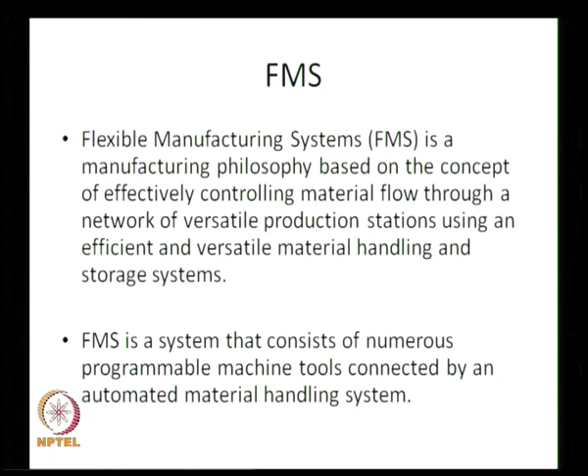Initial cost is very high largely because of the components of the FMS. A network of machines, a large set of programmable machine tools, each of them is extremely costly. Automated material handling and retrieval systems are costly. They can be rail guided or AGV, automated guided vehicles. Computerized control systems are costly to develop and implement, and therefore FMS is a costly proposition. Size is small, but the cost is very high.

And secondly, in order to have an FMS in place, the organization should justify it through large volumes. So, if the volumes are large, then organizations go for FMSs, but then the disadvantage is that the organization should have enough volume to justify the use of FMS. Sometimes FMSs are installed and then there is an effort to increase the production volumes.

FMSs are classified into 3 types: flexible manufacturing cell, flexible manufacturing system, and flexible manufacturing line. So, FMC, FMS and FML. All these are essentially terminologies. Flexible manufacturing cell by definition is like a single cell, as in cellular manufacturing, having 3 or 4 different types of automated machines coming together, and all the parts are produced within the cell and the parts are made and sent to customer or to assembly.

Flexible manufacturing system by definition is a collection of flexible manufacturing cells, at least 2 or more flexible manufacturing cells, each cell having a certain number of automated machines as well as a computer controlled material storage system and material handling system, more than one cell. Parts are made in different cells, can be assembled or sent to the customer. Except for the size and aggregate volume, FMC and FMS are the same.

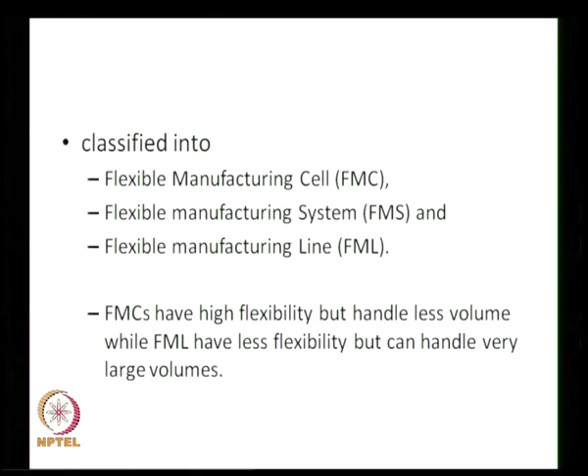Now, since the system is called a flexible manufacturing system, it has to be flexible. So, we try and define what are the types of flexibilities that are part of a flexible manufacturing system. Several flexibilities exist. Now, we concentrate on 5 important aspects of flexibilities, and these 5 flexibilities are operation flexibility, part flexibility, changeover flexibility, routing flexibility, path flexibility. So, there are 5 flexibilities that are defined, and each of these are explained as follows.

Operation flexibility is the ability to perform more than one operation on a given part type. So, the given part type is fixed, it is set up on the machine, but then we have multiple tools working on the part, and that is called operation flexibility. Due to operation flexibility, the time taken to produce reduces significantly.

Many things change. Normally, the time taken as far as the computations are concerned is the sum of all the operation times, but when the FMS has operation flexibility and can do 2 operations at the same time on the piece, then the time is the maximum of the 2 and not the sum of the 2. So, the very approach to calculating the time taken changes. So, operation flexibility brings in a completely new perspective with respect to manufacturing.

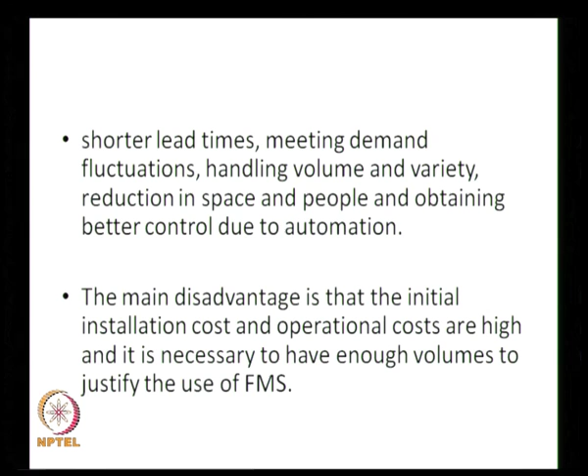So, all these types of flexibilities also help a flexible manufacturing system to cut down the first important gain which I mentioned is shorter lead times. So, lead times are shorter due to these flexibilities which are part of the flexible manufacturing system.

Now, we get into some aspects of modeling in flexible manufacturing systems. So, several researchers worked on different types of problems in flexible manufacturing. Some of these problems are unique to flexible manufacturing. While the problems are unique to flexible manufacturing, the methodologies used to solve them are new in some cases and traditional in some other cases.

So, we will look at some interesting production planning problems in the context of FMS, and we will look at them in detail through numerical examples, and we will also try and solve them using newer methodologies as well as existing methodologies. So, one of the important works in the area of flexible manufacturing is by Stecke, who gave 5 production planning problems in flexible manufacturing. She defined 5 important problems which a production planner should consider while implementing a flexible manufacturing system.

So, the first one is called the part selection problem, second one is called the machine grouping problem, third is the production ratio problem, fourth is the resource allocation problem, and the fifth is tool and machine tool allocation problem. These are the 5 important production planning problems in FMS. Now, what is the part selection problem? Part selection problem talks about choosing that subset of parts which are going to be made in the FMS.

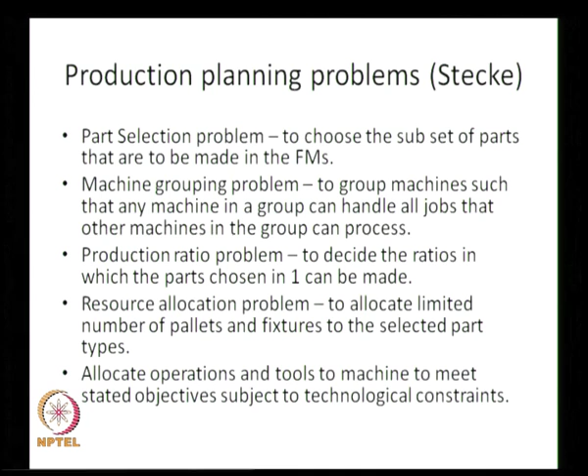Resource allocation problem, to allocate limited number of pallets and fixtures to the selected part types. FMS contains pallets and fixtures, tools, these are all sometimes scarce resources. We do not have too many tools that are available; we might have just one tool of a particular type, and that tool now has to be scheduled.

It can be fixed on different machines at different points in time to handle different parts. So, resource allocation problem essentially allocates all the scarce resources to the machines over time. So, there is an allocation and there could also be a scheduling, which actually comes in the fifth problem, to allocate operations and tools to machines to meet stated objectives.

Making a part would involve a set of operations, and each operation would require a set of tools. Now, it is not necessary that all the operations go to the same machine. So, if there are more than one machine in a group, then some operations can go to machine 1, some operations can go to machine 2.

Now, this helps in balancing the loads, which essentially, when we are producing a large batch, brings out items quickly. So, there is a load balancing objective when jobs are allocated to different machines and operations are allocated to different machines. So, sometimes the entire job is allocated to one machine, where we do allocation of jobs to machines.

Sometimes the jobs contain several operations, and some operations are carried out in one machine, while some other operations are carried out in some other machine. Now, when certain operations are allocated to certain machines, then the corresponding tools have to be allocated. So, there would also be constraints about the availability of these tools.

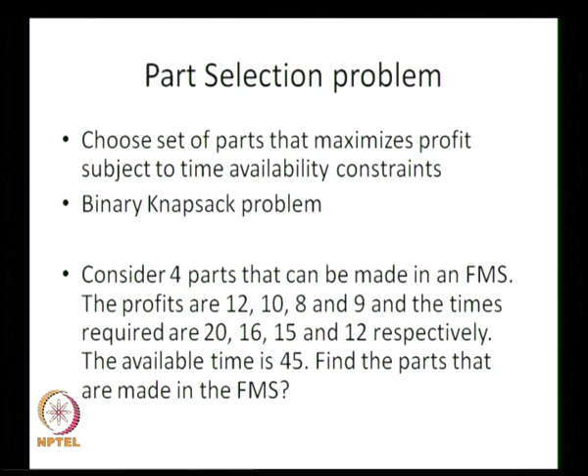So, we look at 4 parts. The profits are 12, 10, 8 and 9. And the times are 20, 16, 15 and 12. Now, we have to find out which of the 4 parts are to be made on the FMS. The reason is the time available on the FMS is 45, whereas the time required on all the 4 put together exceeds 45. So, all of them cannot be made. So, which are the ones that are going to be made?

So, we define 20 x1 plus 16 x2 plus 15 x3 plus 12 x4. So, xj equal to 1 if part j is going to be made in the FMS, xj equal to 0 otherwise. So, the profit will now become 12 x1 plus 10 x2 plus 8 x3 plus 9 x4, which is to be maximized subject to a single constraint, and xj is binary, it is either 0 or 1. Now, this problem is called a binary knapsack problem.

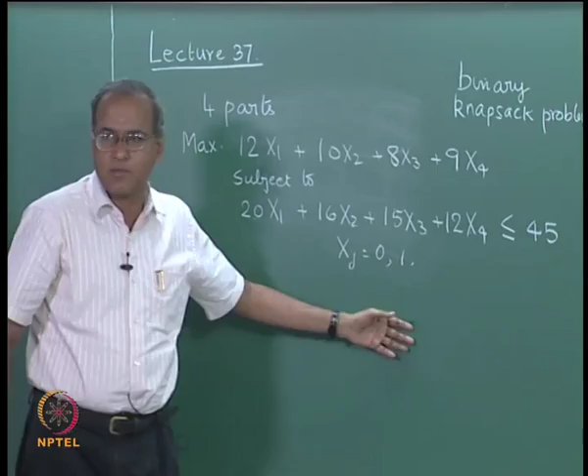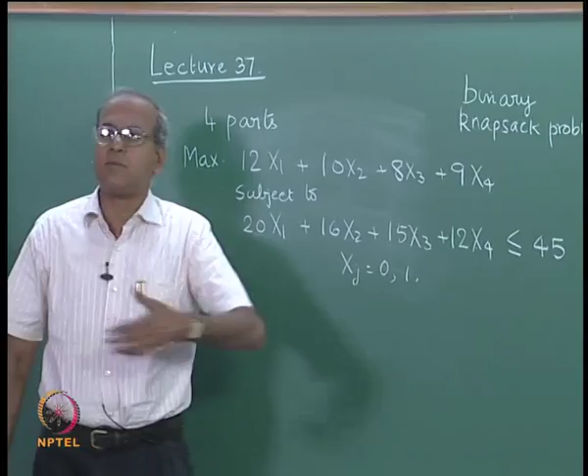Now, from an operations research perspective, it is a simple integer programming problem, binary IP with one constraint and a maximization objective. So, this problem can be solved comfortably up to a reasonable size, even though theoretically this problem is a difficult problem. Up to a reasonable size it can be solved extremely comfortably. So, we could simply solve this problem using a simple solver to get a solution.

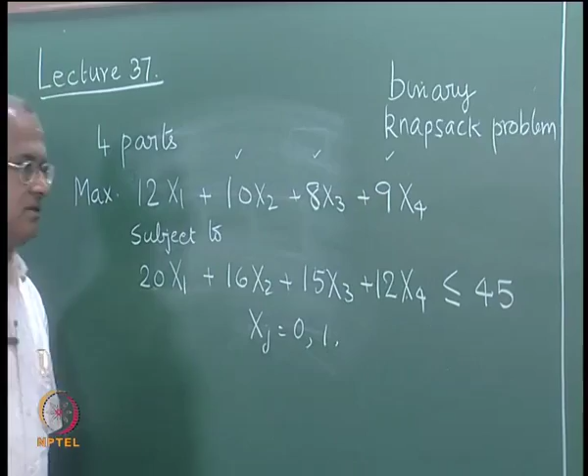Now, the optimum solution is y1 equal to y2 equal to y4 equal to 1. Now, essentially, to begin with, we can actually directly solve this problem as an IP, there is no difficulty at all. So, the solution is 10, 8 and 9, these are the solutions that make up. So, we can actually solve this with the x itself. I will later explain why we define the y's, but we can solve it with the x itself.

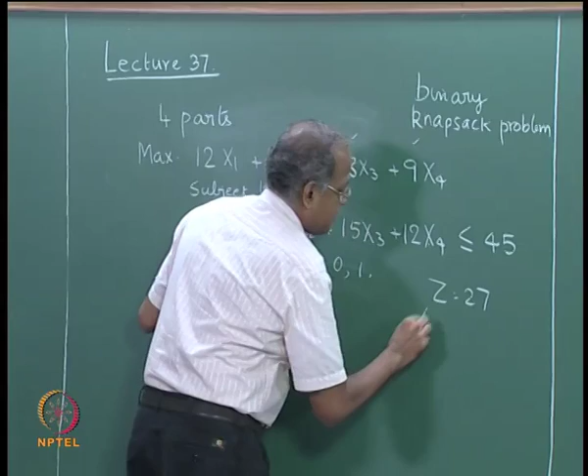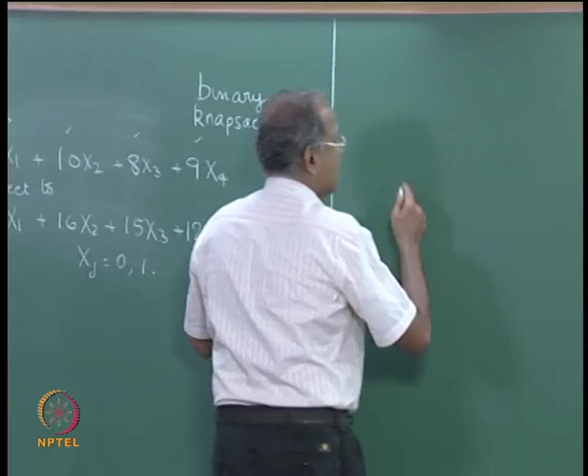So, this would give us 16 plus 15 is 31 plus 12 is 43. So, 43 units is used, and the profit will be 10 plus 8 is 18 plus 9 is 27, with x2 equal to x3 equal to x4 equal to 1 as the optimum solution if it were solved using a particular solver. But if we do not have a solver and if we wish to solve it optimally, then we could do what is called a branch and bound algorithm, which I will describe now.

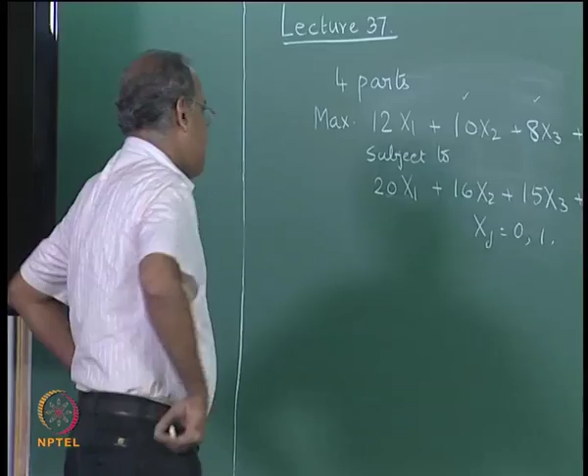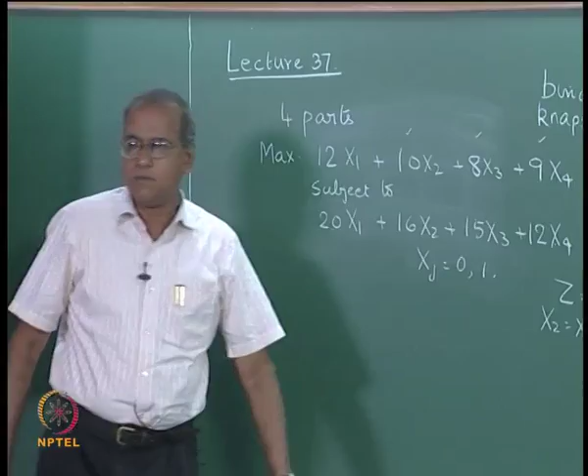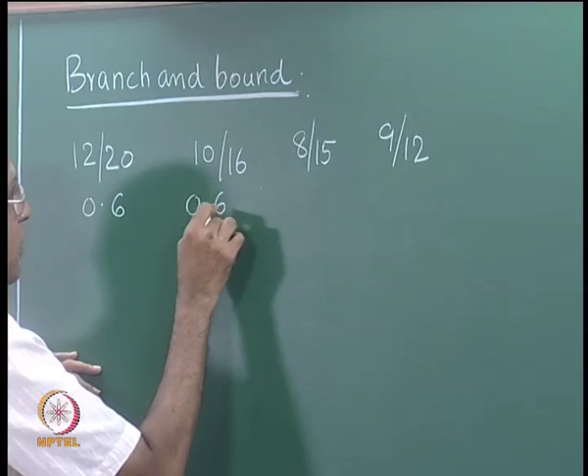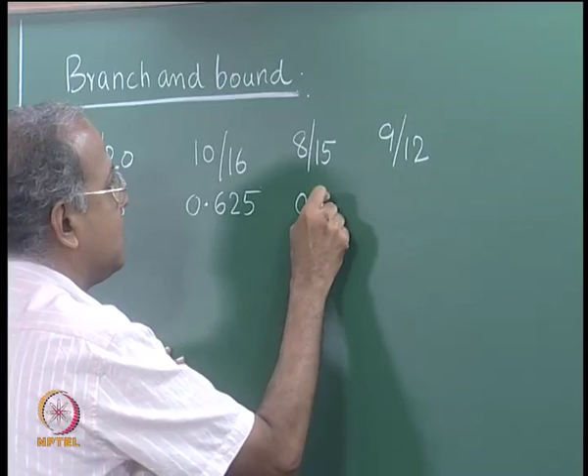Now this is something which we have done earlier also. What we do in this case is to find out the ratio of the objective function to the constraint. Whenever you have a single constraint integer programming, either binary or integer, you find out the ratios. So the 4 ratios are 12 by 20, 10 by 16, 8 by 15 and 9 by 12. So 12 by 20 is 0.6, 10 by 16 is 0.625, 8 by 15 is 0.533 and 9 by 12 is 0.75.

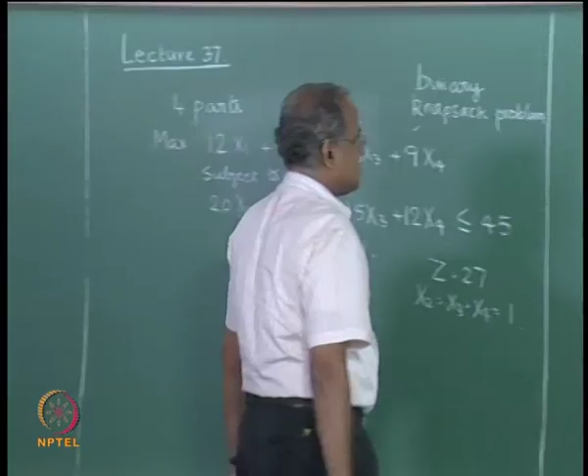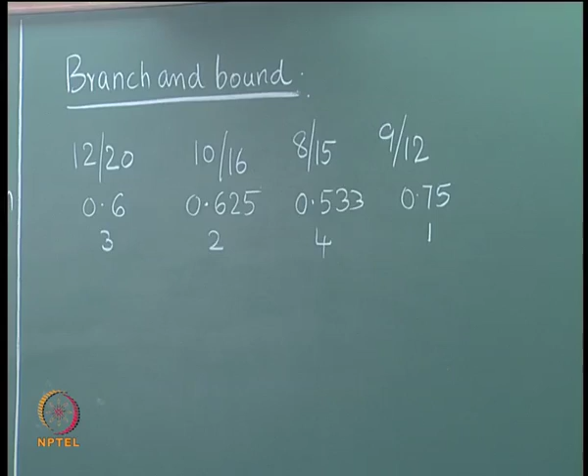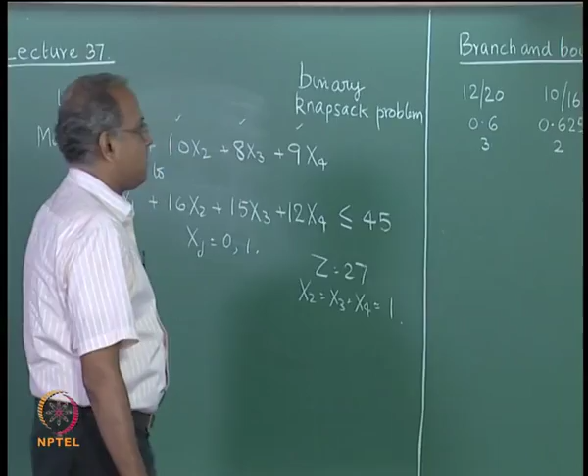Now arrange the variables in the decreasing order of coefficients. So this will become 1, the highest coefficient, this will become 2, this will become 3 and this will become 4. Now rewrite the problem by renaming the variables. So x4 will become y1, x2 will become y2, x1 will become y3 and x3 will become y4.

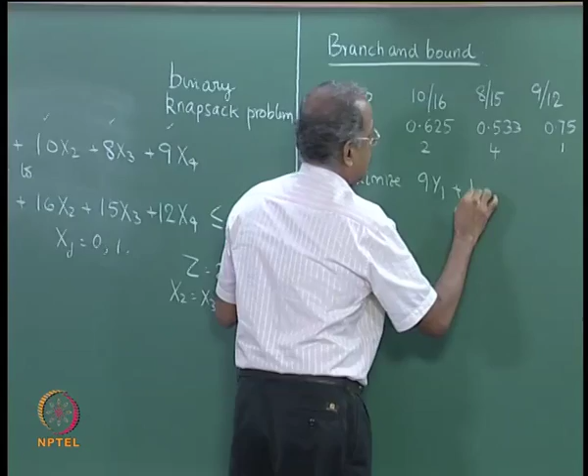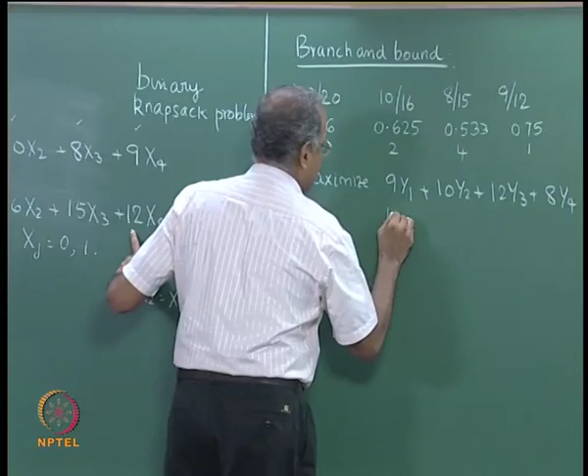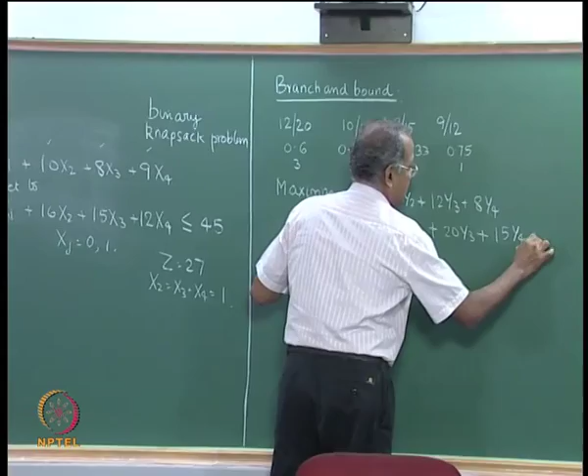Therefore the problem will take the form that is given in the slide, which is to maximize 9y1 plus 10y2 plus 12y3 plus 8y4 subject to 12y1 plus 16y2 plus 20y3 plus 15y4 less than or equal to 45. Now yj is binary.

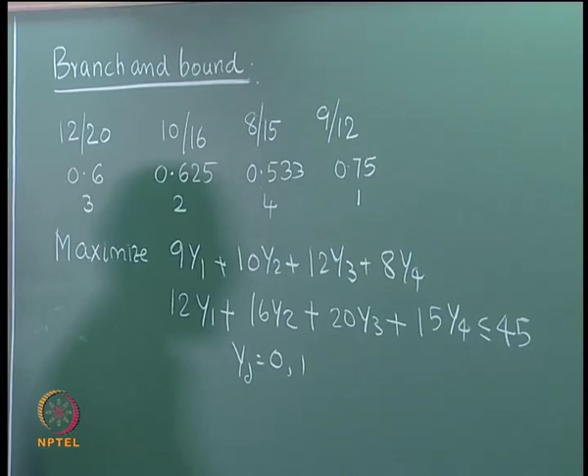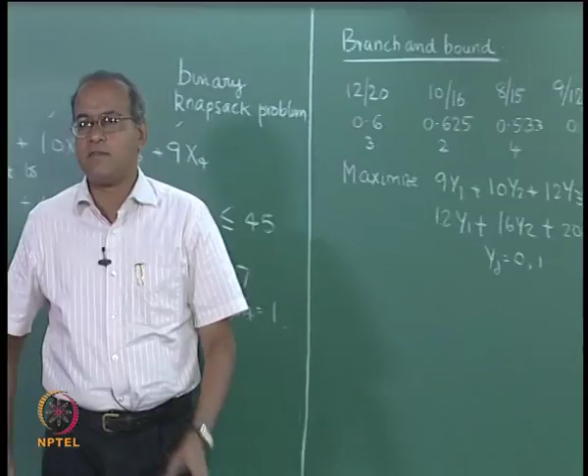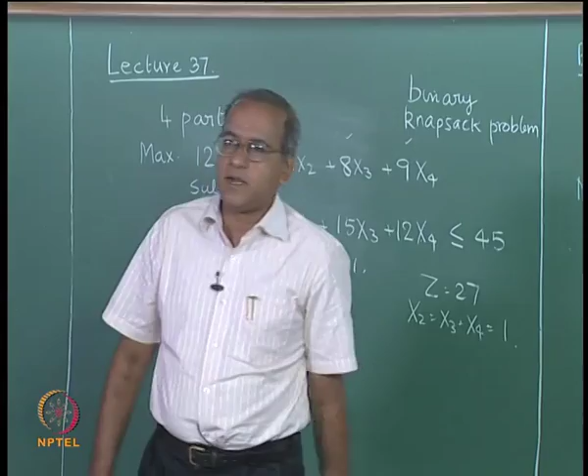For that reason the variables are rearranged. Now this is a binary IP because of the 0 1, it is not a linear programming problem. If we solve a linear programming problem out of it, the variable in the solution will be the leftmost variable that we have. For that reason this is being done. This also helps us to develop a branch and bound algorithm, which we will see now.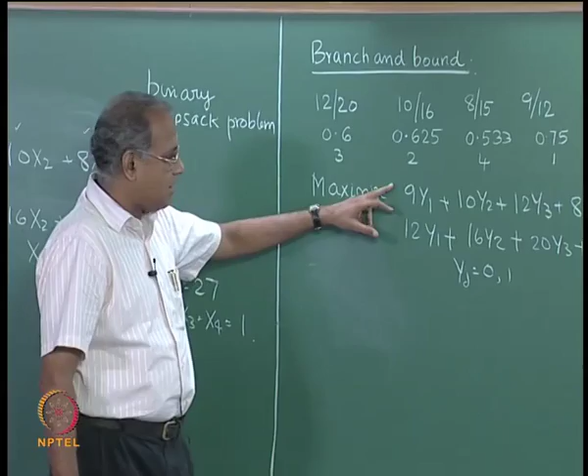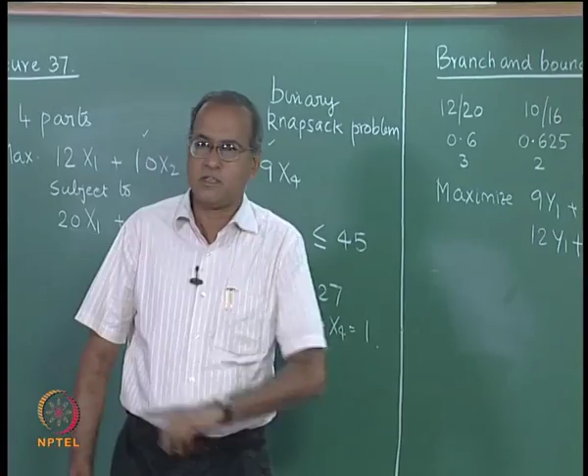We start the branch and bound algorithm by solving the linear programming problem first. So we solve an LP relaxation of it, with yj greater than or equal to 0. Now this is a single constrained LP, therefore only one variable will be in the solution, and we have already sorted the variables in the decreasing order of Cj by Aj. So the leftmost variable will be in the solution.

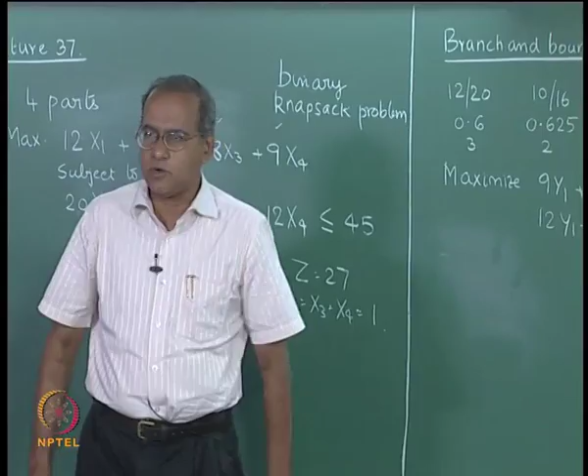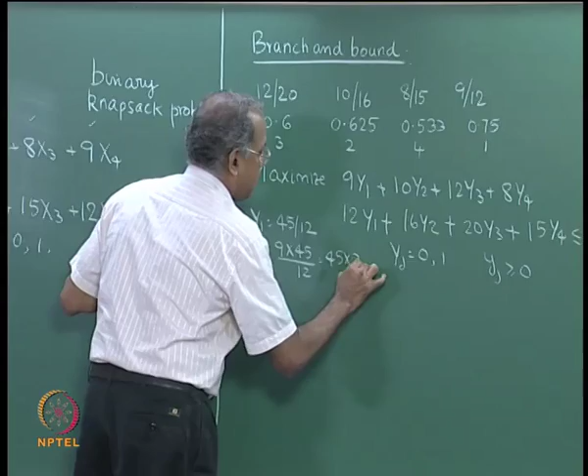So this would give us a solution y1 is equal to 45 by 12 and z is equal to 9 into 45 by 12, which is 45 into 3 by 4, which is 135 by 4, which is 33.75. So this would give us a solution with 33.75.

It is a maximization problem, therefore the LP relaxation will be an upper bound to the binary or IP optimum. So this would tell us that the optimum is less than or equal to 33, it cannot be more than 33 or it cannot be more than 34.

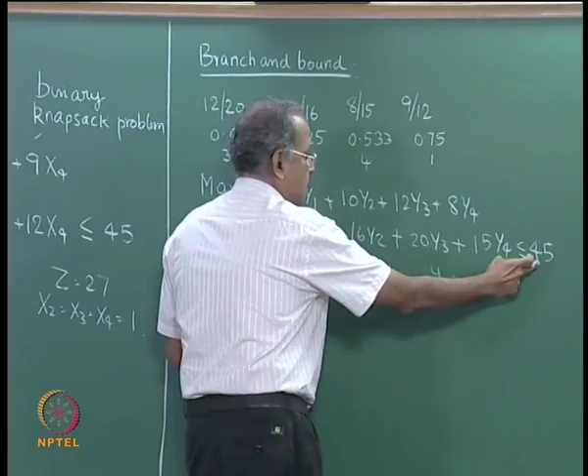So now we proceed and create two nodes where y1 is equal to 1 and y1 is equal to 0. So when we force y1 equal to 1, this variable comes out of the solution. 12 units are already used, so now what is available is 33, because this 12 is already used in y1.

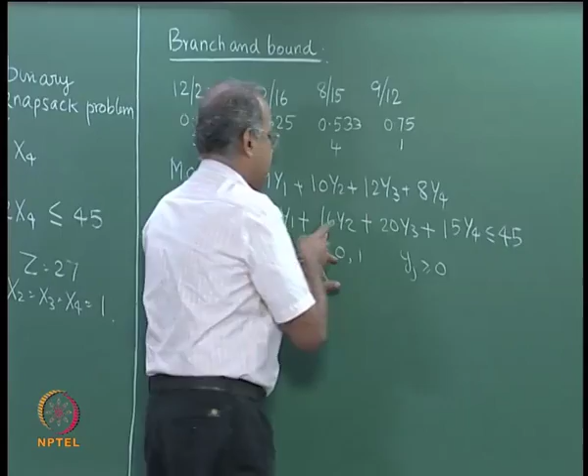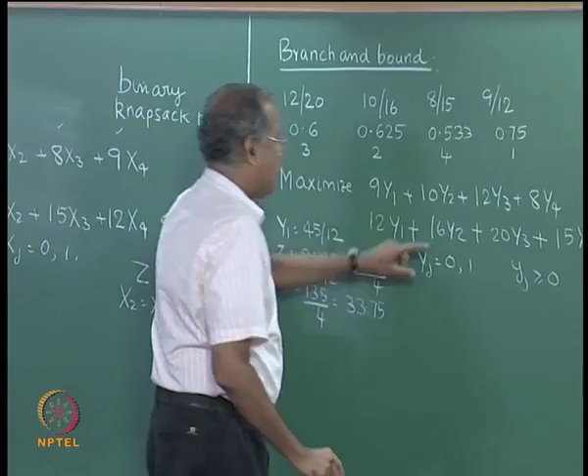So when y1 equal to 0, the corresponding LP solution will now become y2 equal to 45 by 16, and z is equal to 10 into 45 by 16, 5 into 45 by 8, 225 by 8.

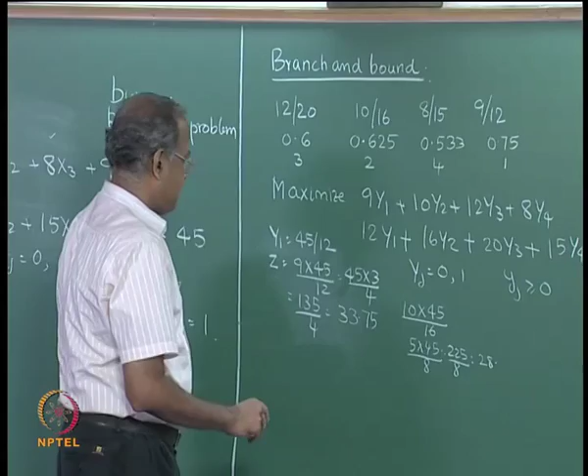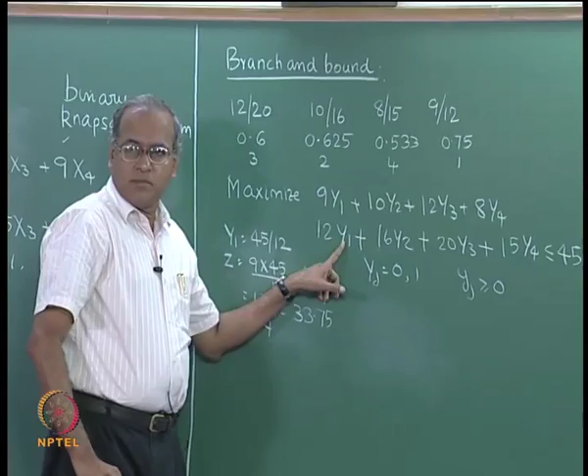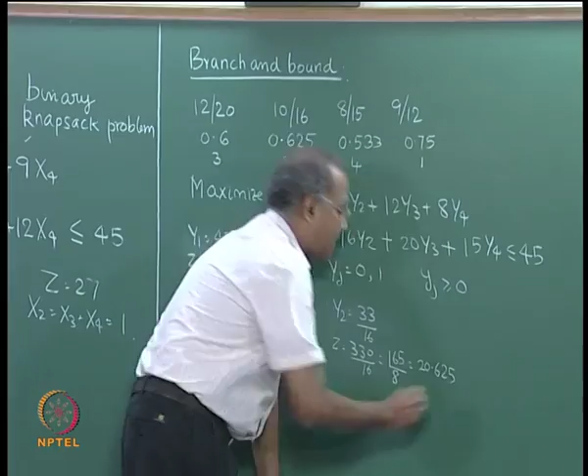y1 equal to 1 means 12 units are already used up, so only 33 units are available. So this will give a solution y2 equal to 33 by 16 and z is equal to 330 by 16, which is 165 by 8, which is 20.625, plus another 9 because y1 is equal to 1. So upper bound is 29.625. Now you see that it has come down from 33.75 to 29.625.

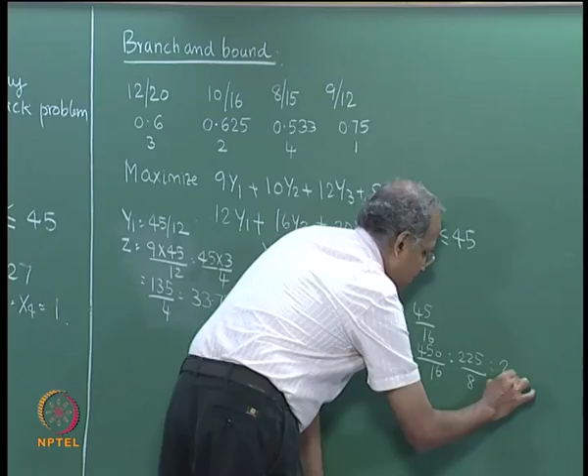Now y1 equal to 0 would give us a bound. Now y1 variable is out, but all the 45 resources are available. So the solution will be y2 equal to 45 by 16 and z is equal to 450 by 16, which is 225 by 8, 28.125. So this would give us y2 is equal to 45 by 16 and z is equal to 28.125.

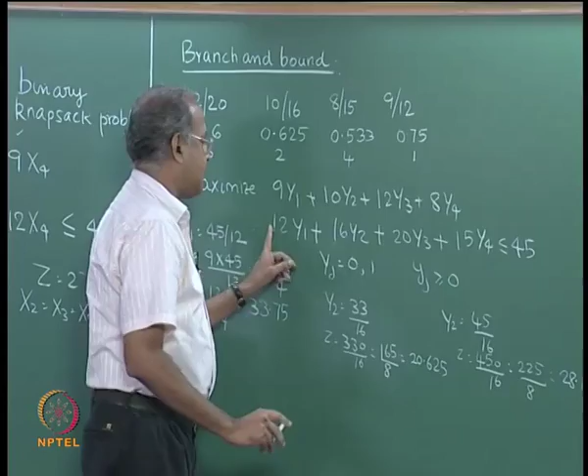Now we branch from the node that has the higher value. So now y2 is equal to 1 and y2 is equal to 0. So y1 equal to 1, y2 equal to 1 takes away 12 plus 16, 28 units. So 17 units are available here. So y3 will be 17 by 20, z is equal to 12 into 17 by 20, which is 51 by 5, which is 10.2, plus 19. So you get 29.2.

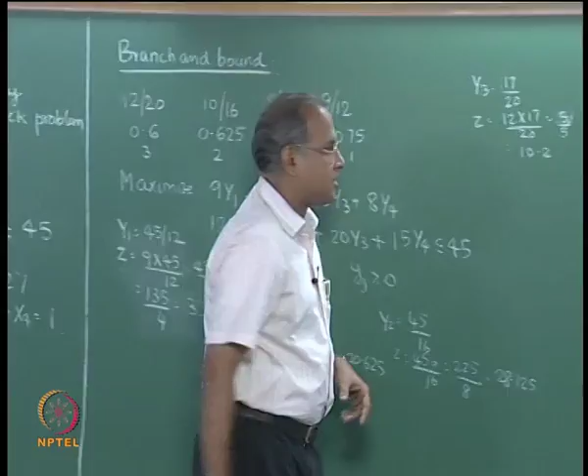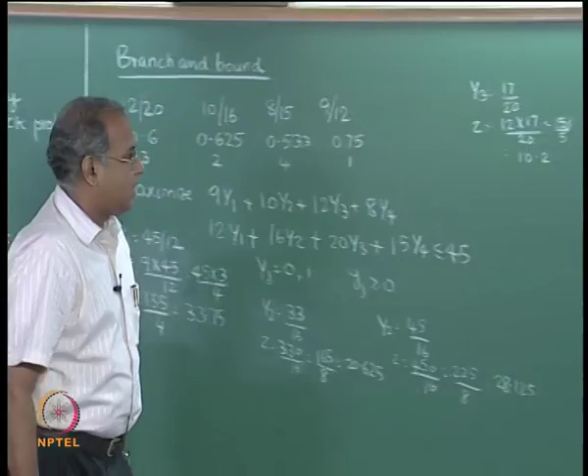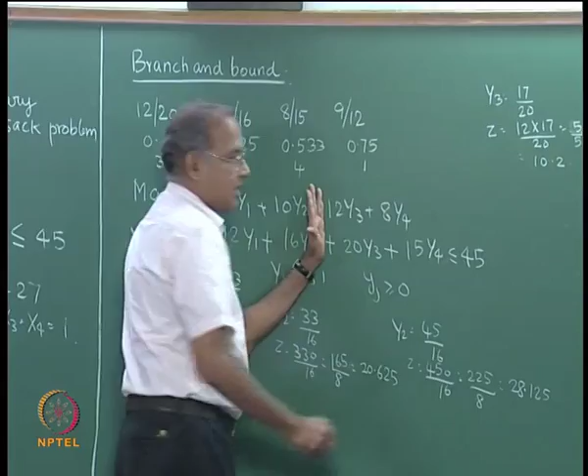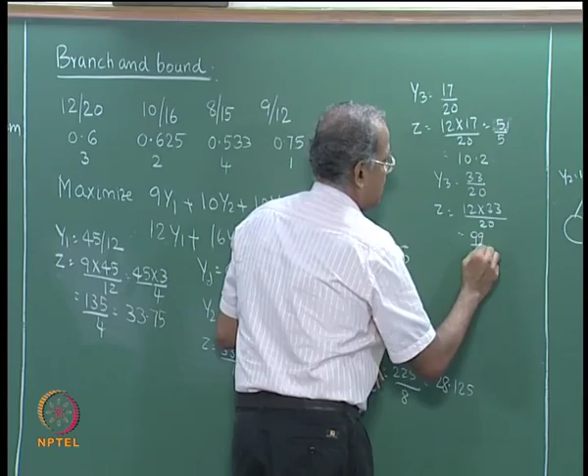The other one will now become y1 equal to 1, y2 equal to 0. So we are operating here. y1 equal to 1 takes away 12, so 33 units are remaining. So y3 will become 33 by 20 and z is equal to 12 into 33 by 20, which is 99 by 5, which is 19.8, plus 9 is 28.8. So this will become 28.8.

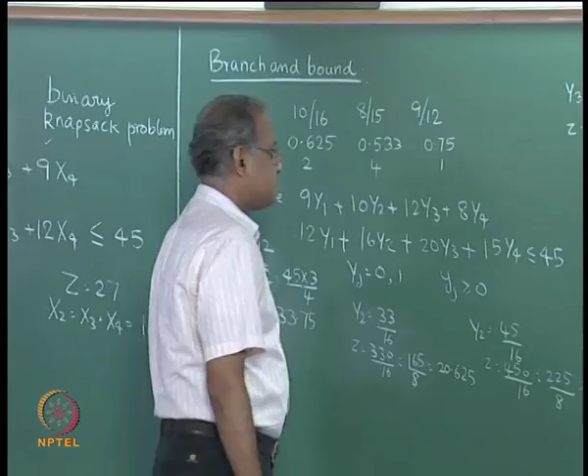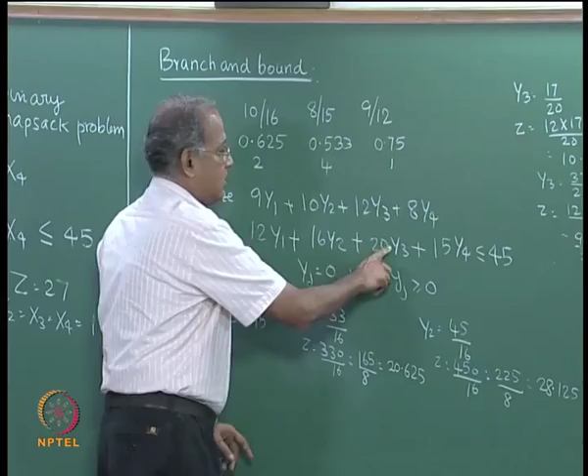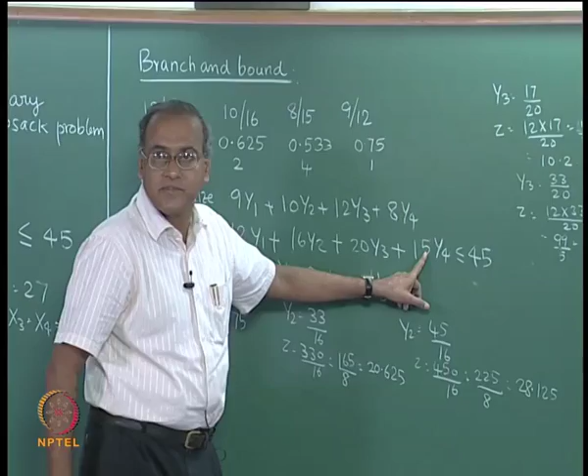So now again y3 can take 0 or 1. So y3 is equal to 1, y3 equal to 0. So y1 equal to 1, y2 equal to 1, y3 equal to 1 is 12 plus 16, 28 plus 20, 48 is infeasible. Now 16 plus 12, 28 plus 15, 43 is feasible. So when y3 equal to 0, we come to the last variable, which is y4. So y4 can take 0 or 1.

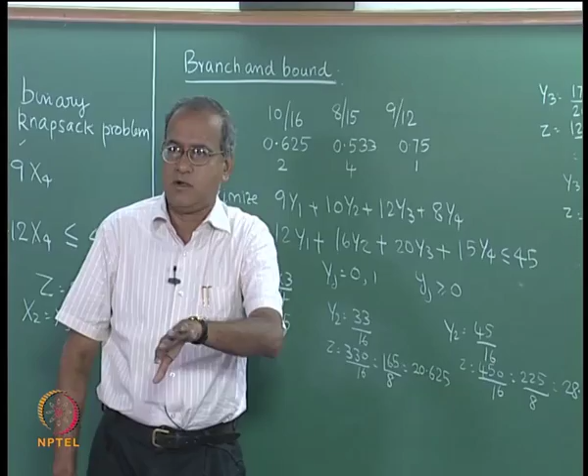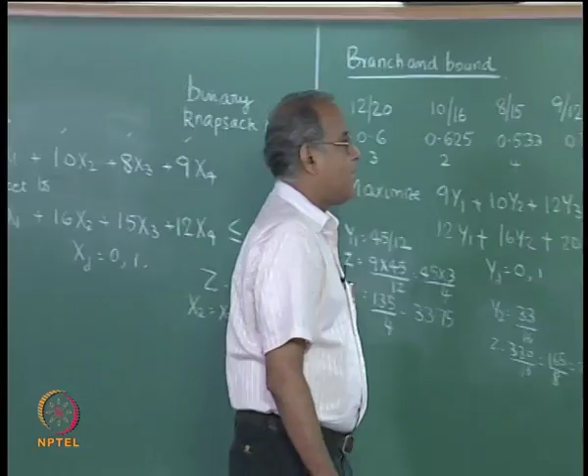So y1 equal to 1, y2 equal to 1 takes away 28 units, 17 units are available. So that can give us y4 equal to 1 and z is equal to 9 plus 10, 19 plus 8, 27, which is feasible to this problem. Now we have to go back to the other things and branch.

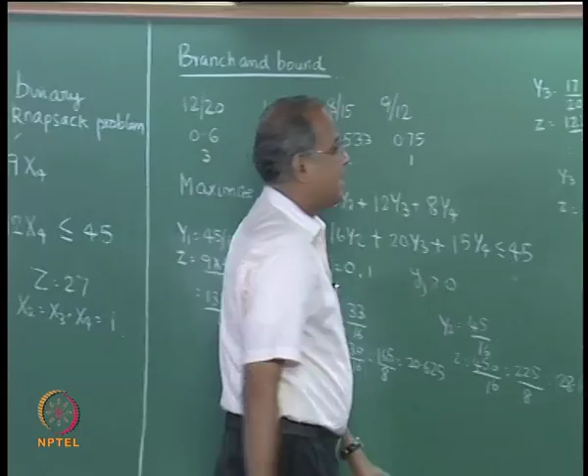So when we branch from here, we create two nodes, which is y3 equal to 1 and y3 equal to 0. So now when y3 is equal to 1, y1 is 1, y3 is 1, y2 is 0. So we have 12 plus 20, 32 that is consumed. So automatically y4 will have to be 0.

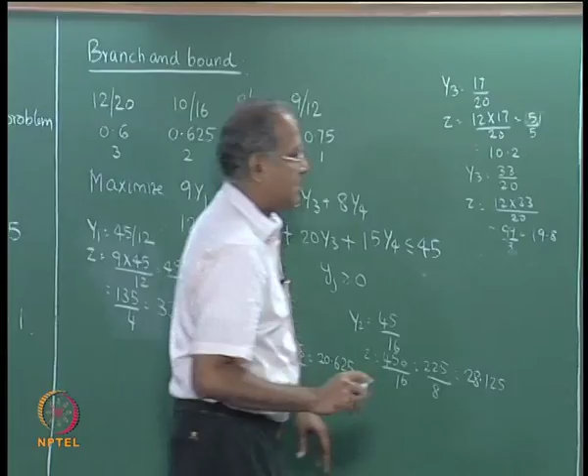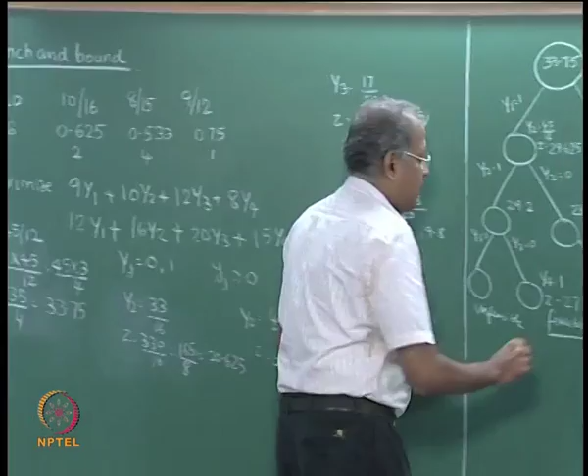So this will give a feasible solution, y1 equal to 1, y3 equal to 1 with 12 plus 9, z equal to 21. And since it is less than 27, this is fathomed. The fourth one is y1 equal to 1, y2 equal to 0, y3 equal to 0 will give us enough resource to do y4. So y4 equal to 1 and this will give us z equal to 17, which is again fathomed.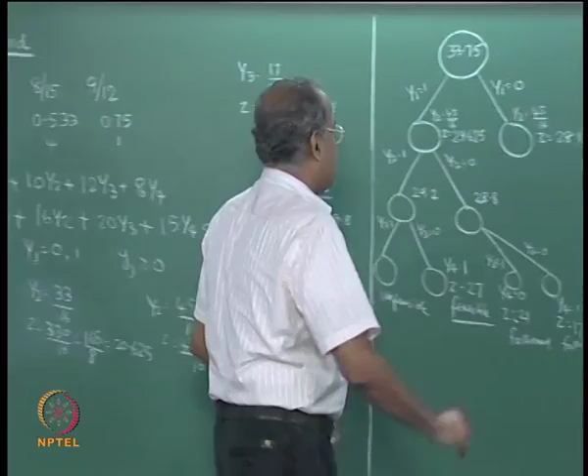So right now we have a solution with z equal to 27, which is our best solution, but the algorithm does not stop, because we also have to branch from this side, because from here the upper bound is 28.125. So we could get a solution with 28, because these are all integers and these are binary. So the objective function value at the optimum will be an integer. So there is still a chance of getting a solution with 28, which we have to explore. Right now the best value is 27.

Now we will continue the branch and bound algorithm and try to get to the optimum solution in the next lecture.